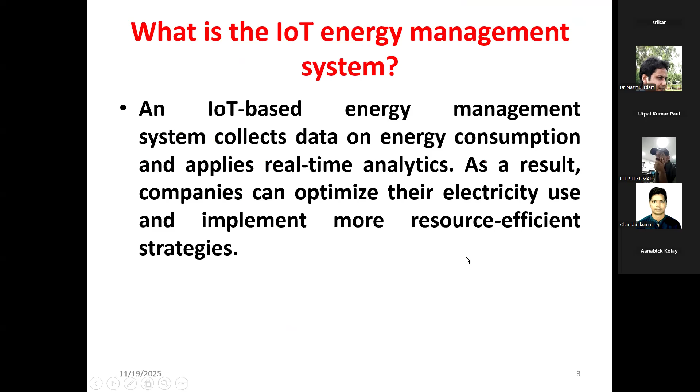How does this fetching and other things happen? Here we are using wireless communication protocols, such as Zigbee or LoRaWAN. These are the different facilities which we are trying to use in the system such that I am able to communicate from the device onto the system.

Nowadays we are using Wi-Fi very much for data transmission and other purposes, because earlier we had only wired connections, which were for a limited purpose. But because of Wi-Fi, I got larger bandwidth and I'm able to communicate with any system anywhere. That's how 5G and 6G are used nowadays. Most people are now using fifth generation wireless communication, through which we are able to make the data flow in a comfortable, quick and faster manner.

And then we have edge computing. When I'm talking about edge computing, it talks about the response time. Response time means whenever something goes wrong, how much time is required for me to respond to that particular issue. As I told earlier, whenever some electrical equipment is in use but I'm not using it properly, I have to get some intimation. That intimation is called the response time, or we'll call it latency.

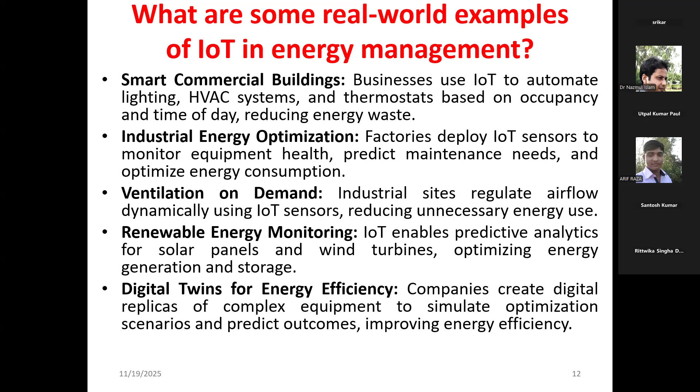What does IoT system management really look for? It looks for crucial and efficient handling of numerous connected devices, which must work in smooth operation, be secured, and function without being affected. Some devices require more current, some require less, and accordingly the system has to provide that - that is called the management.

The second part is remote configuration, which makes the system more secure and reliable. You configure the system for when it has to be on or off, managing things through the software.

When going for an IoT energy management system, I'm looking for real-time energy monitoring. At present, the IoT senses the data and tells what exactly is happening with the devices in real time. Based on that, AI-driven predictive analytics tells whether demand is more or less at a particular point of time, and how to optimize things and reduce inefficiencies. Smart grid integration balances supply between high-demand and low-demand areas, as I mentioned with respect to industry and home applications.

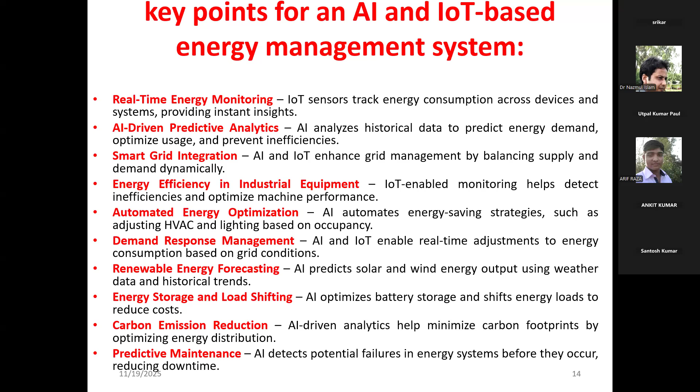Whenever you are using the system, you need to predict, and accordingly work with the system. So this is one simple schematic of the IoT for different applications, how you can make use of the IoT system.

Now look at what IoT has got, and what are the different functions it has to do. Then what is system management? System management refers to the process of managing the entire life cycle of Internet of Things devices and sensors, from planning and onboarding to monitoring and maintenance through retirement. That means the management is from input to output. The entire process has to be controlled, and it has to work according to the requirement and according to the process. Then only we are able to do the things.

So somebody has to do that management. So IoT will take care of that management.

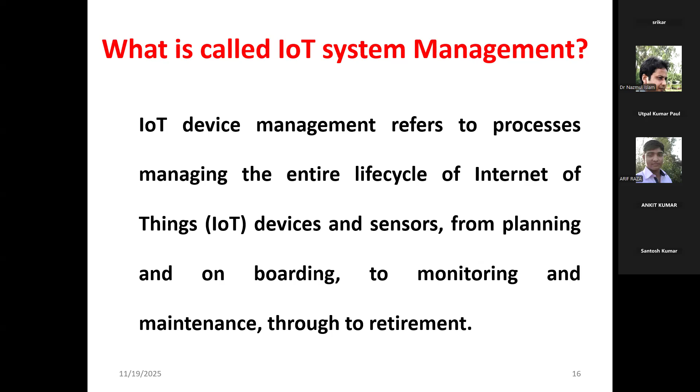So here, whenever the system wants to be better, we need to have smart sensors and data collection. Smart sensors get the desired data. If unwanted data exists, you try to discard that. Collect the data.

And this data has to be stored. Move it to some memory location - that is, connected devices and automation. Then the data has to be stored in the cloud.

And you have edge processing - already we have discussed that. Whenever you want to make a decision based upon edge processing, you have to make the decision and try to develop some algorithms. Through the algorithms, improve the efficiency of the system by detecting the inefficiency and faulty processes in the system, such that we are able to improve the sustainability of the system.

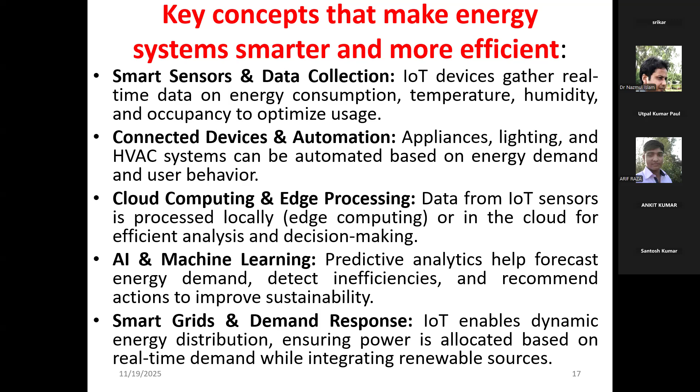And based upon the demand, the smart grid has to work, whether to allow or not allow in any given real time. What are the different renewable energies there, how are we able to use them and interconnect them. Then what are the trends of this renewable energy?

So why do we have to use these IoTs? First one is lower carbon footprints - that means try to minimize the wastage of power. Optimize the system, and it improves the efficiency of the system, reducing the emission. So when you are not using them, it causes the emission of carbon. So you try to avoid that by switching it off. So you are able to reduce the carbon footprints.

Second one is enhanced renewable energy integration. Try to use solar, wind, or whatever other fossil fuel alternatives are there. You are trying to make use of them.

And reduced energy waste - automated demand response and predictive analytics prevent overproduction and unnecessary consumption. So energy management clearly addresses unnecessary consumption. If it is not required, switch it off automatically. If it is required, you use it.

Decentralized energy systems - where the IoT will take care of peer-to-peer energy trading and try to provide decentralization. That means if in a colony there are 100 houses, all 100 houses are going to be seen in a different manner. So that is called decentralization.

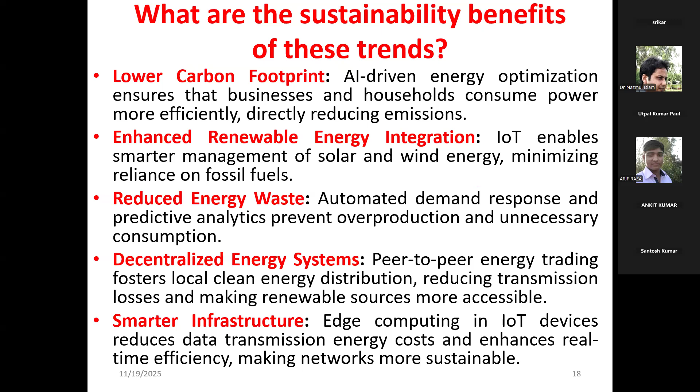And smarter infrastructure - so it makes a cutthroat decision to say use or not use any system.

So in smart grid management, we have three things. One is real-time monitoring - at present, what is the use? Really, does he need that amount of energy or not. By means of sensors, you read it. By means of algorithm, you analyze it. And then you allow that power to be used or not allow the power to be used.

And load forecasting is - so you make a decision that now, for example, in the morning, we are using the water heaters.

So it has to predict between 8 to 9, the water heaters are going to be on, so more power is required for this particular house, so you try to provide more power. After that, we are not using it, so we all are going to office, nobody is there at home, so zero power is required. Then you turn off everything such that that power can be used somewhere else.

So this decision has to be made based upon the previous or historical data and other parameters we are trying to work with. The third one is optimized: you try to use only the specified and optimized load, and you can reduce the waste in the system.

And why is this renewable energy required in the system? That is for predictive maintenance. This explains how artificial intelligence can analyze the data from a renewable energy system, predict the failures, and improve the maintenance.

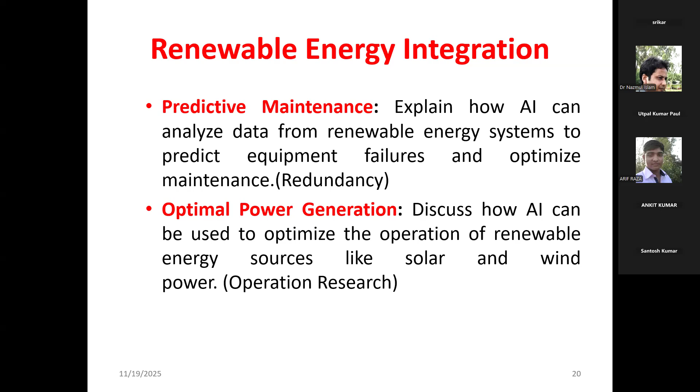Then optimal power generation. So whenever you have other alternatives, you try to produce the optimal power and try to use these systems.

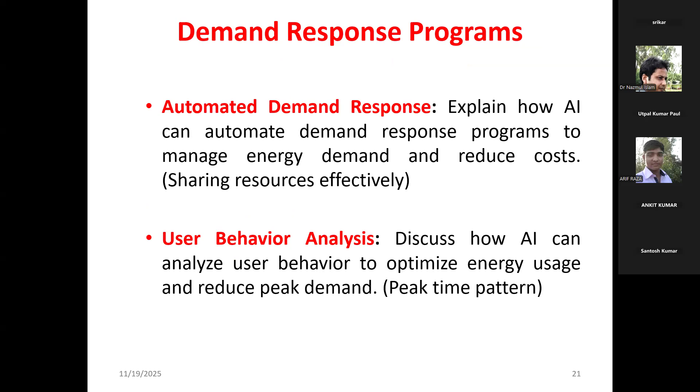And what are the programs? Demand response programs, so automated - you make the whole system automated. And behavior analysis: when is the power required more and when is it required less, when is the peak time and when is there no peak time in the system - that decision has to be made. And whenever I'm talking about management, that is process management.

So data collection and transmission - how you are getting the data and how you are transmitting it. Integration with AI - whatever power data you are taking, integrate it with the algorithm. The algorithm will make the prediction and maintenance is going to be done.

And then finally, you have the case studies. A few case studies of the grids, renewable energy, and energy efficiency can be discussed, and we can work on these things, and we can apply artificial intelligence and other cases onto this.

The challenges are data privacy and security. Whatever data is there, it should not be given to somebody, so the security has to be proper - my data should not be theft by other people.

Scalability and complexity - scalable means knowing what energy is required, so that I have to tell. And ethical considerations - ethical consideration is that the theft of energy should not happen, so the algorithm has to take care that ethically it is right, that it is doing ethical jobs. Only then can you make use of it; otherwise, it should not be supported.

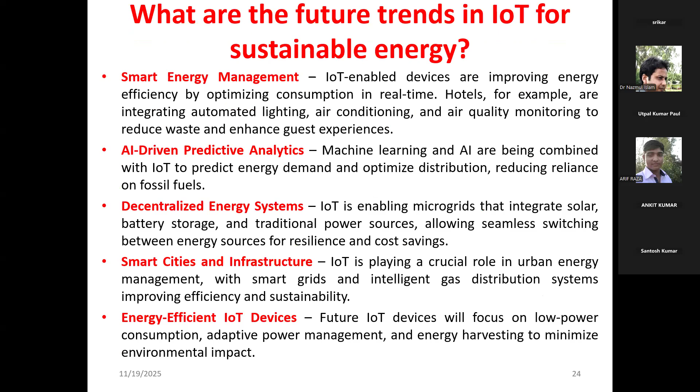And sustainable energy - we have already seen this. To conclude, IoT-enabled energy management is revolutionizing how societies pursue sustainability, improve operational efficiency, and reduce cost through real-time data and predictive analytics. The continuous advances in connectivity, AI, edge, and cloud computing are accelerating IoT's transformative impact on energy systems globally, and it is able to facilitate energy devices and grids for sustainable development while addressing challenges related to data privacy and crucial applications.

And as we continue the ongoing digital transformation in the energy sector, as I told you, the cables are being replaced with Wi-Fi. So again, IoT will have importance, and collaboration with other technologies will make IoT-based sustainable energy management more effective in practice. So that's what I want to tell and discuss with you people.

I hope if any questions are there, I am ready to take them. Thank you.

Thank you so much, sir. Anyone have any question regarding this from participants? Anyone have any questions? You can ask. Anyone have any questions? It's okay, thank you then.

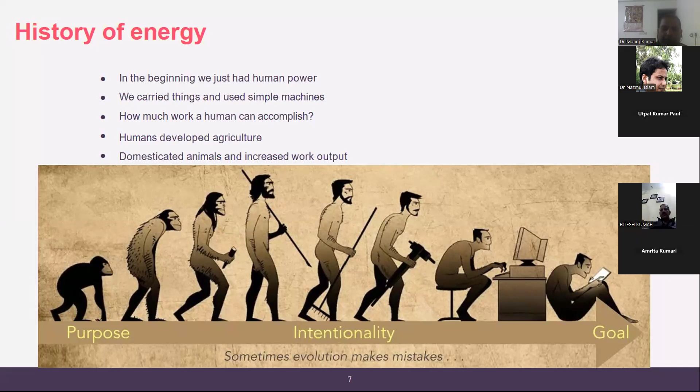This is the evolution of human beings. From the starting to today's era, even working in 6G generation, we are moving from start to end, yet in the same position. In all aspects we are looking to get more improvement and efficiency. To do that we need technology, and that requires more energy. So finally, we have to optimize our energy resources.

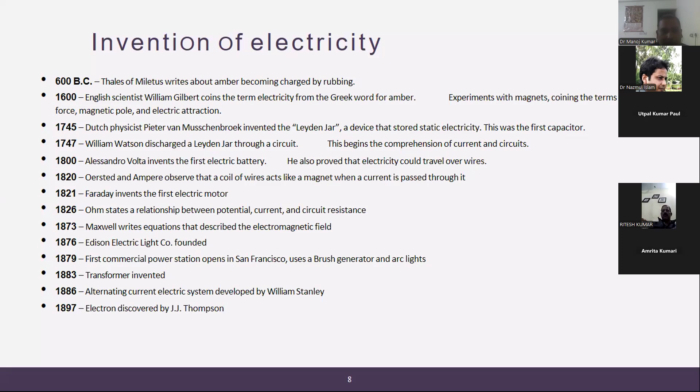This is the journey of invention of energy. Finally, today we get energy by electricity. The significant inventions by scientists from 1745 to 1897 - you can see different scientists, William Watson, who discovered comprehension of current and circuit. Then Faraday invented electric motors, then Ohm, then Maxwell, Edison - and the breakthrough was Edison founding electric light in 1876. This is the contribution of a number of scientists who worked out different options in electricity.

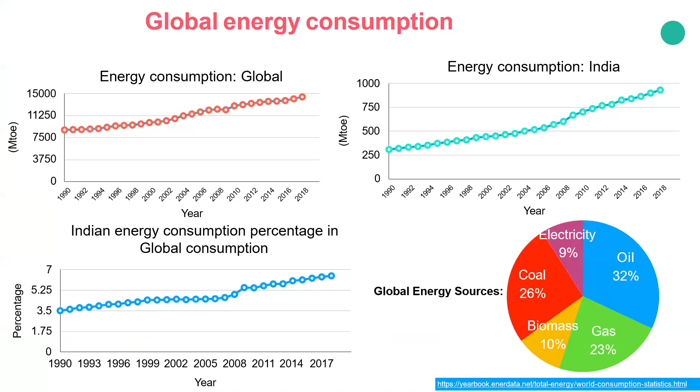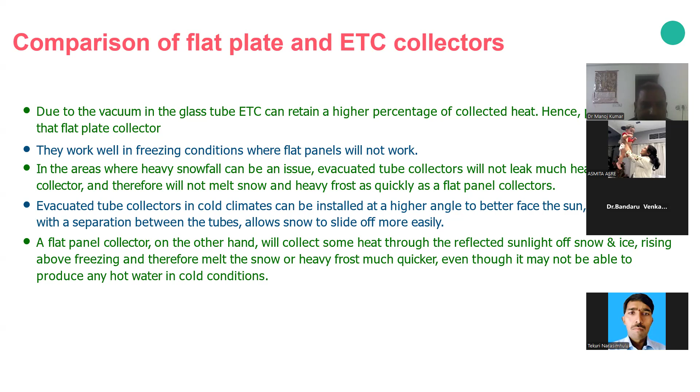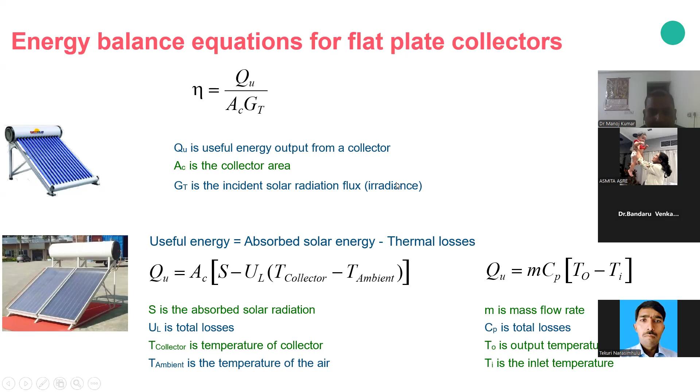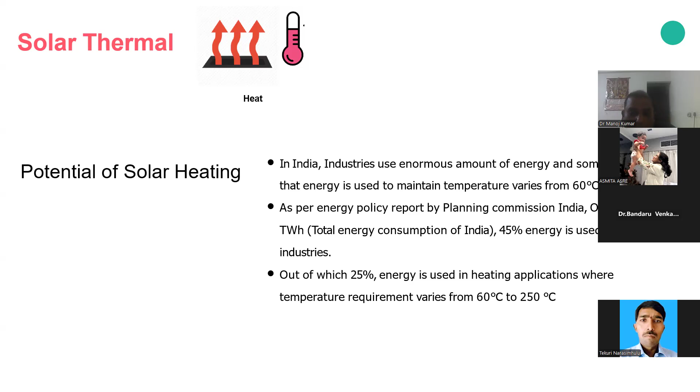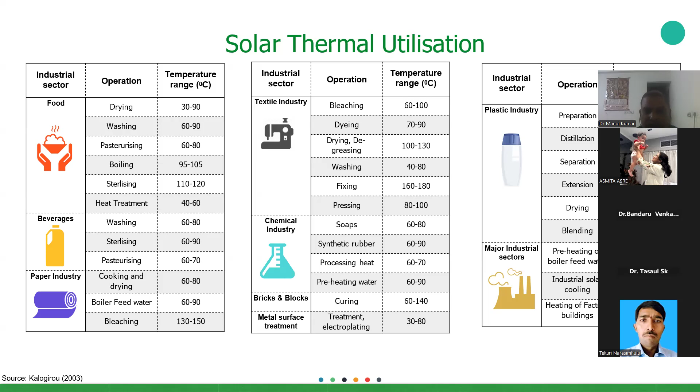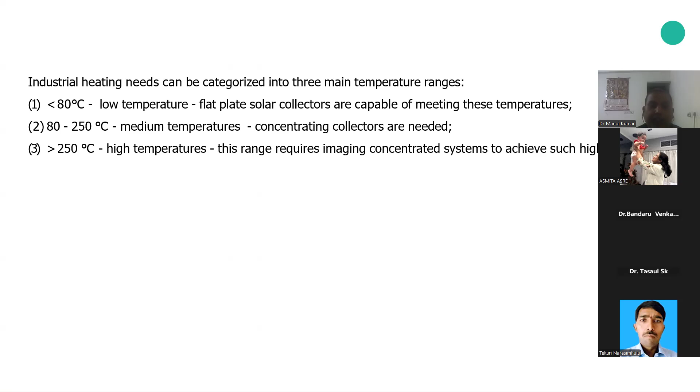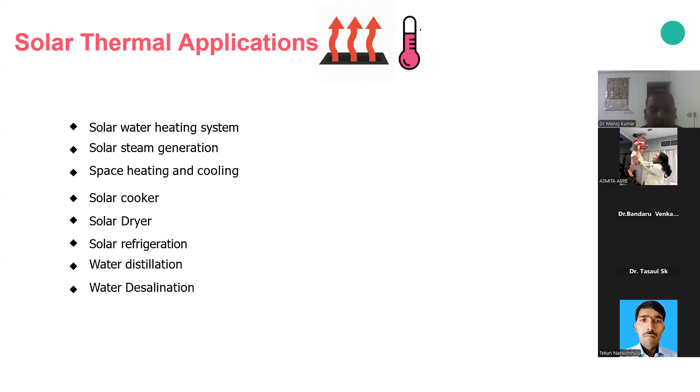Even we are working on solar refrigerators also, so we will not use electricity from power plants to operate our refrigerator. Then especially for water distillation, especially in Saudi Arabia where there is a lack of water. So distillation is a very important issue. Even in India, a lot of people face so much pollution in water, we need distillation. We cannot go for all aspects using electrical energy to purify things. So we have an aspect of solar thermal application also.

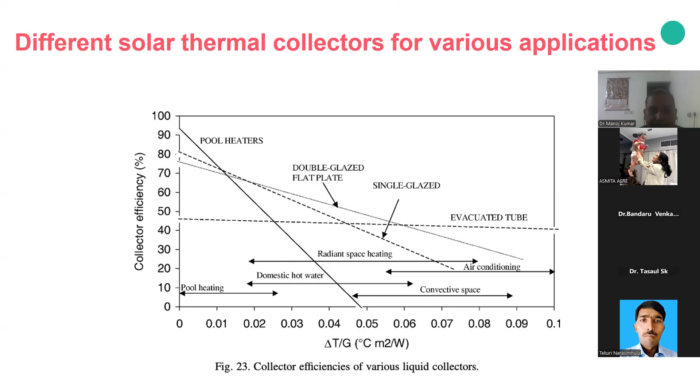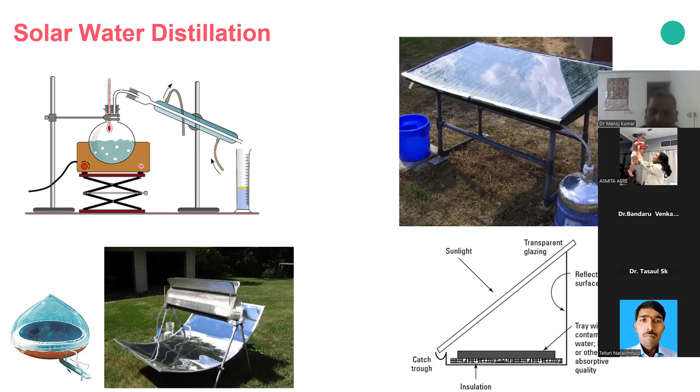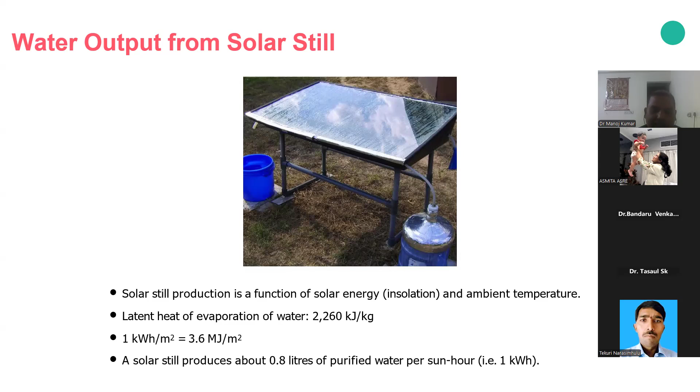Now we have discussed a lot of applications in different industries for different processes, even at different operating temperatures and aspects. We can conclude that by the use of solar thermal energy, we can replace coal and other petroleum products for our applications. So the one solution we got is solar thermal energy for all aspects in industry.

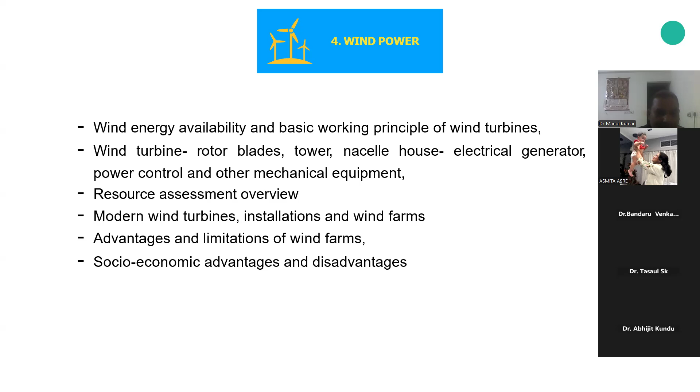So what is wind? Wind is air in motion, traveling between areas of different pressure, or due to pressure difference. According to Pascal's law, or Bernoulli's principle, total energy conserves as P plus delta P plus rho gz plus half rho V squared equal to constant. So total energy is constant.

There is movement of air, wind, due to temperature difference. Even uneven heating causes pressure difference in the environment or atmosphere due to uneven heating of Earth's surface. So warm and light air rises because it becomes lighter, and due to density difference it moves in the vertical direction, and due to the natural convection process, heat transfer takes place, carrying enthalpy as well.

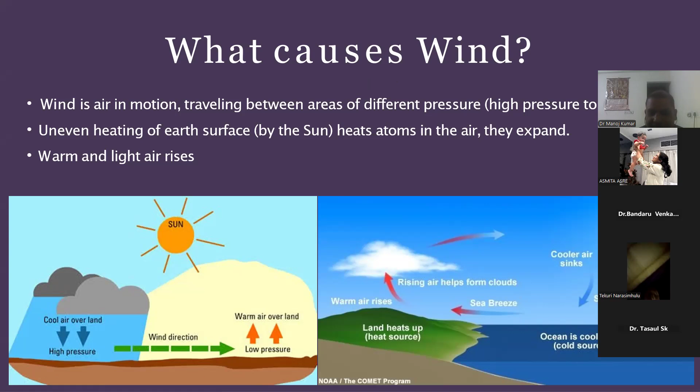Now again we are going for mathematical analysis. We are dealing with technology, so we cannot just talk about qualitative analysis of any technology being beneficial without a mathematical model. Why is it important? When we design any wind system or solar system, we should know the mathematical parameters like design parameters, thermal parameters, and for material selection, we should know the material properties of the system.

For wind power, it's very simple: kinetic energy equals half mV squared. Finally it's converted in terms of density and wind speed, that is half rho A V cubed, where rho is the density of air, A is the swept area of the wind blade of the turbine, and V is the velocity.

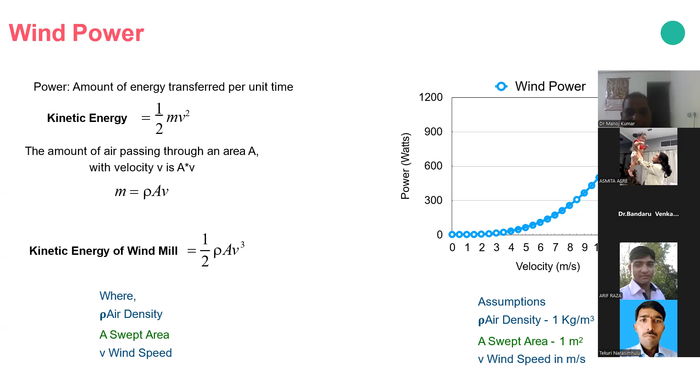Again, it is explained in terms of the design parameter of the blade of the turbine: half rho pi D squared by 4 into V cubed. Why are we looking at this? Because we have another choice, we can increase or optimize the kinetic energy by changing the diameter also. So design parameter is one thing, and material selection is the second important thing.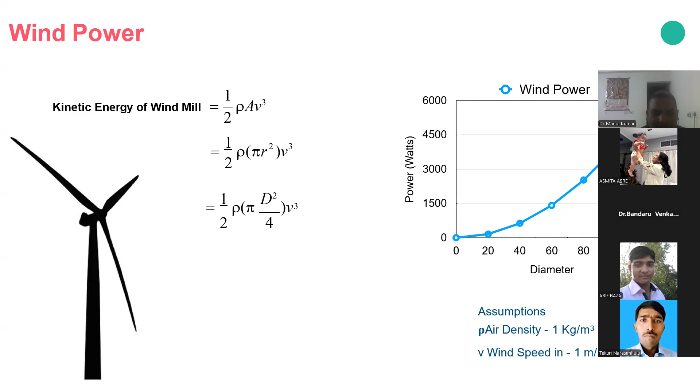So there are some important features we should know for the selection criteria for windmill installation. The first is wind resources, then environmental impact. The most important thing is minimum risk of agro-forestry operations. It should be close to a suitable electric grid, so that whatever energy is generated can be transferred to the electric grid for further use.

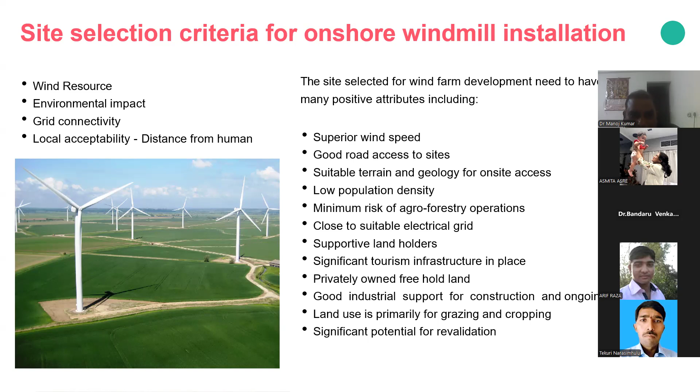That I already explained in the first slide. So whatever development we are going for, it should be user friendly and environmental friendly. That will help for further development.

So we have studied about mathematical modeling of wind turbine. What are the ways to improve wind turbine output? The first is, in the mathematical equations I explained, faster wind speed, and we go for the blade, with different parameters like the angle of blade and the thickness of blade.

It is similar to the turbine in hydro power. So a larger generator is also required, just to convert this wind energy into electrical energy, and finally that will generate electricity. So these four are the important parameters.

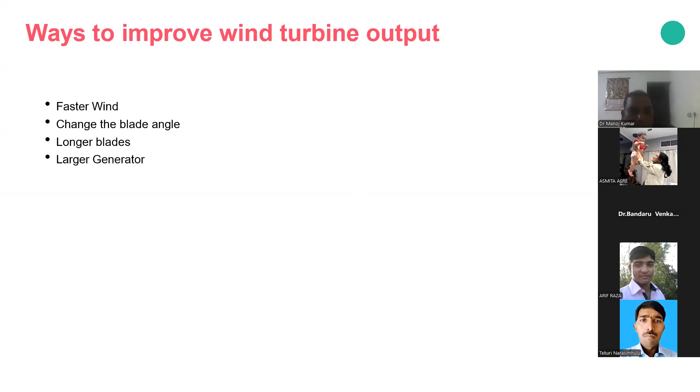So if you are going to do a study for anything important, the first important thing is: what are the advantages? Why should we go for that? Without this objective, nobody can go for any technology. So the first thing is renewable and sustainable source. It is renewable, no gas emission, no cause of global warming, and no impact on society, surroundings, or the environment.

Second is reduction of fossil fuel consumption, meaning we are exploring alternatives, so we will not depend much more on fossil fuels when we have alternatives. Then, free resource: wind is free, there is nothing to pay as tax for using the wind.

Second is small carbon footprint, then better land utilization. All this wind power installation takes place on the coastal area where we don't have any industry, or especially for the agriculture sector that we have to pay cost for.

Next, both industrial and domestic turbines exist in a range of sizes, depending on our wind velocity and our requirement. Especially in that case, we are also looking for a large generator to convert wind energy into electrical energy. Then, it can provide power in remote locations.

In some areas of India, especially remote parts of western Gujarat or Maharashtra, it is very difficult to supply energy from the main grid that is based on fossil fuels. So we have an alternative to provide energy to people in remote areas through the use of wind power.

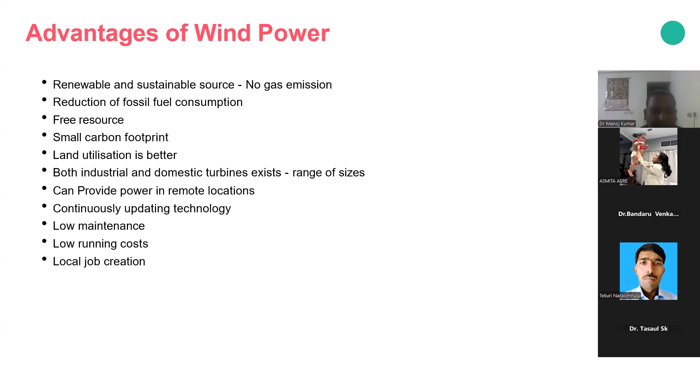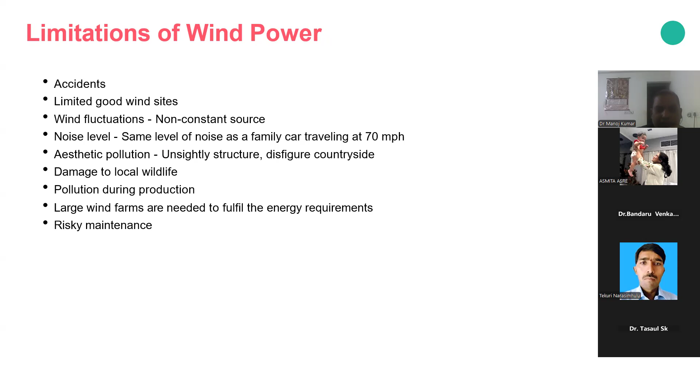But the physics behind that involves drag force and lift force. I'm already teaching courses in NIMS University where we talk about drag coefficient and lift coefficient. When air flows over the surface, it creates drag and lift, causing rotation, and due to rotation, it has energy. There are optimized angles between the blades that increase the final output power, so it is very difficult to design a blade.

From the naked eye, it seems very simple for it to rotate, but when designing these blades, you have to check stability for mechanical strength as well as aerodynamic strength, since we are dealing with blades. All these parameters make the design more technical.

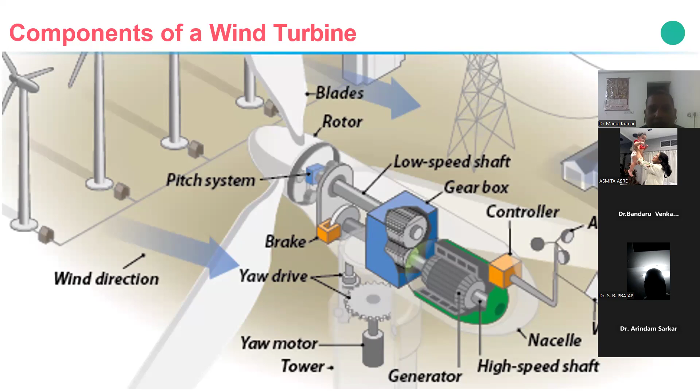So we can go for commercialization even in remote areas for the development of our country, and it is replacing fossil fuels very quickly. That is really an interesting topic for our future study.

From the previous study, I explained why we are looking for renewable energy. First, we explained that due to the use of fossil fuels and petroleum products, oxidation of these products emits CO2, CO, NOx, and other pollutants that indirectly increase surrounding temperature and may cause global warming. So just to remove these problems, we shifted to renewable energy.

First we discussed solar energy, which is extremely versatile and user friendly, covering its advantages, disadvantages, and different types of collectors. Then we moved to wind energy, where the problem is we cannot use it in some areas, especially UP, Bihar, and Himachal Pradesh, where we don't have sufficient wind velocity. That is a restriction for wind energy, but not for solar thermal energy, which is versatile, and in 80 to 90% of areas people are generally using solar collectors for energy generation.

Now exploring options beyond fossil fuels, we look at ocean energy, also called ocean thermal energy, which we'll discuss in detail in the next slides, including its availability in the Indian context, conversion processes, and technical aspects. Second and third, we'll cover tidal power's basic conversion principles and challenges, then primary energy supply, and finally assess whether the system is sustainable or not.

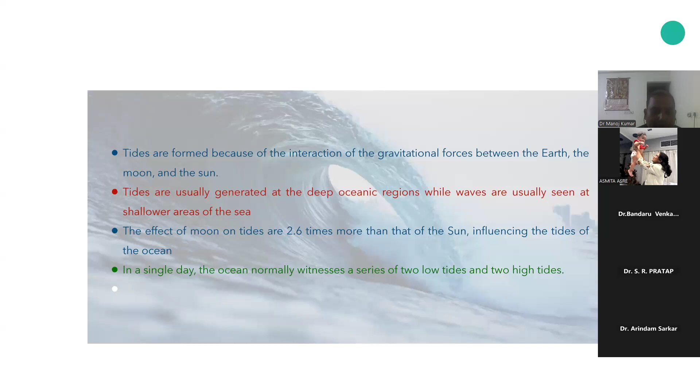As I explained earlier, there are 2 types of tides. One is high spring tides, which occur when the sun and moon line up with the earth - this occurs whether they are on the same or opposite sides, meaning the angle between these three will be either 0 degrees or 180 degrees, giving us a high tide region. The second is low tide region, which occurs when the sun and moon line up at 90 degrees to each other, giving us a low tide region.

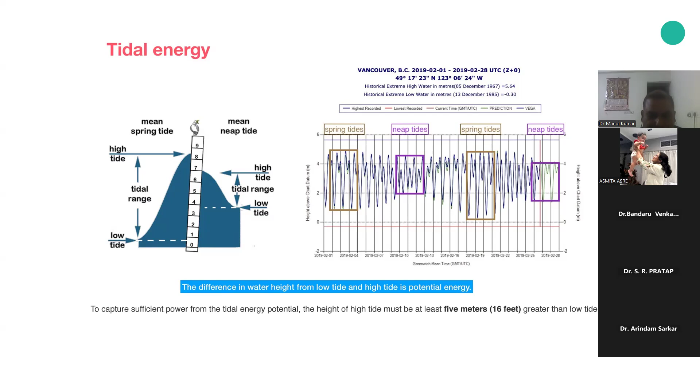A total of 12,455 megawatts of tidal energy is generated, especially in Kutch and Khambhat. These are the two important locations in India with maximum tidal energy extracted from the ocean. Apart from that, in Andhra, Tamil Nadu and other regions, there is a moderate value of tidal energy, comparable but not zero, though the maximum points are only at Kutch or Khambhat.

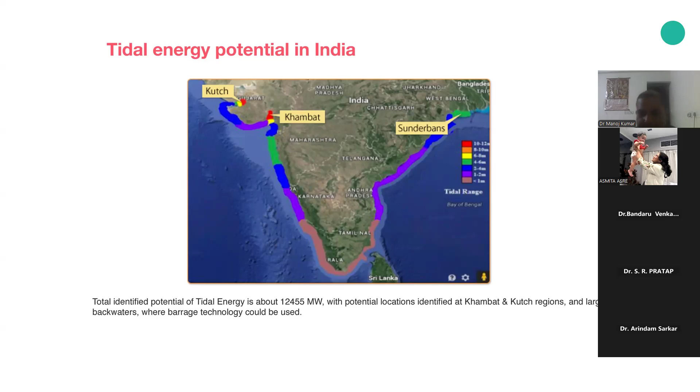So what are the mechanisms that generate tidal energy? This is the technical aspect, called a tidal generator. One type of tidal generator system uses a structure similar to a dam, as we have seen in hydropower plants. The barrage is installed across the inlet of an ocean or lagoon, forming tidal basins.

It works like a water reservoir storing energy from low tides and high tides. Sluice gates on the barrage control water level and flow rates, allowing the tidal basin to fill on incoming tides and empty through an electricity turbine system on the outgoing tide. Since we don't have high tide and low tide all the time, we use a generator to maintain continuous energy, with flow controlled by the sluice gate.

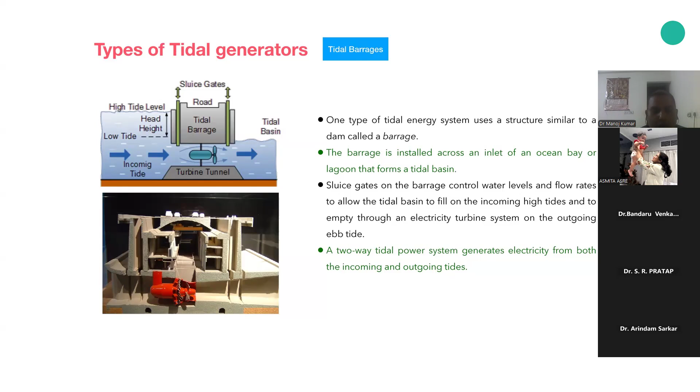This process is similar to a hydroelectric power plant: in winter or rainy season we store water, control the flow rate, and get hydroelectric energy throughout the year. Similarly, in the middle of the sea, tidal generators are installed, working with different types of high tide and low tide. In the corner of the slide, I have shown the actual tidal generator installed at the mid of the sea.

In 1961 and 1967, the Rance Tidal Power Station was installed in France, making France the first country to work on tidal energy, about 65 years back. The power plant, built by Electricite de France, uses tides from the Gulf of Saint-Malo on the Atlantic Ocean to turn its 24 turbines, which they used for commercializing the energy system.

Can you guess how much energy is generated? It generated 240 megawatts, averaging 57 megawatts, giving a capacity factor of 24%, which is very significant. This study explains that we can pursue tidal energy generation where oceans are near the country. Our country is surrounded by oceans on three sides, so we have a lot of opportunity for tidal energy generation, as I have already shown on the map of our country.

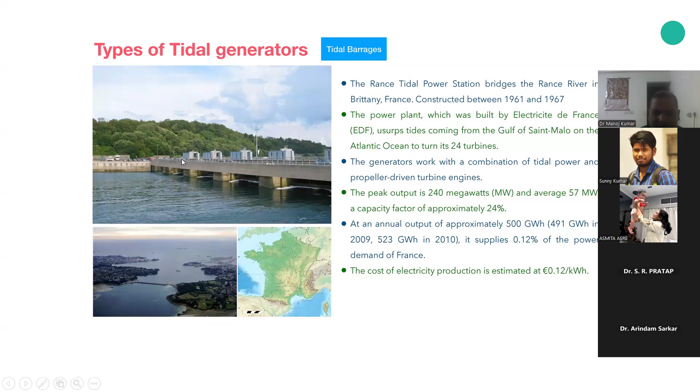That is types of tidal generators. Since 3-4 slides I am discussing about the different types of tidal generators, their components and how it's working. So from these slides we have concluded that...

France is the first country who mostly focused on tidal energy generation sector, and that output was significant. This study also explains that we can go for that because on three sides of our country we are surrounded by oceans. All favorable conditions are there. I have shown the color contour for our country where we can invest our money in the tidal generation energy sector. That will also help our alternatives for fossil fuels, with generating capacity of 20 megawatt and a net output of 30 gigawatt. These numbers motivated us to go for this study and go for this system.

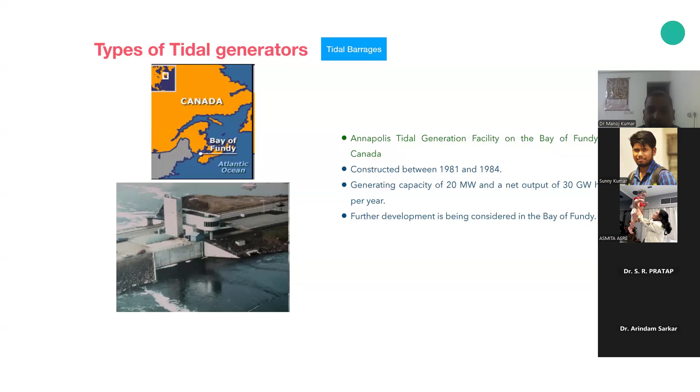Next. So again, we are talking about tidal turbines, which look similar to wind turbines. I already explained that it is similar to the wind turbines. There only we are using air, and here we are using water. They can be placed on the sea floor where there is strong tidal flow, because the water is about 800 times denser than air. So this is the technical aspect where we can go for optimization or maximization of tidal energy compared with the wind turbine.

So even it is not so easy. Turbine blades are more expensive. Tidal turbines are more expensive to build than wind turbines, but they capture more energy. What is the reason? The reason is the velocity of water, if it is not significant, the density is high. So due to density, it has more impact on the blades, which may cause bending. So from the design consideration, we should go for a very different, practical approach to understand and explain the safety parameters. That's why designing of tidal turbine blades is more expensive.

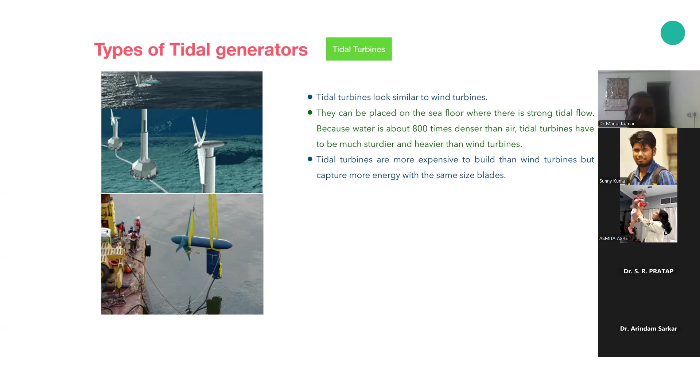So again, similarly for the third one, every system has advantages and disadvantages. Advantages are very simple: clean and compact, continuous, predictable, life of the plant. There is no pollution at all. But the disadvantage is high construction cost, because we are going to implant the system at the center of the ocean. So that is very challenging. Second thing is it may increase turbidity, the amount of matter suspended in the water. The third one is the impact of electromagnetic emissions on marine life.

And finally, lack of research. We don't have sufficient literature survey on this topic or in this study, so we can extend the study for exploration of research for the next generation very frequently. It requires a lot of effort to study in this area, especially in tidal energy. Even though it is effective, it requires more investment. That's why people are not going in this direction, especially in our country. Next slide.

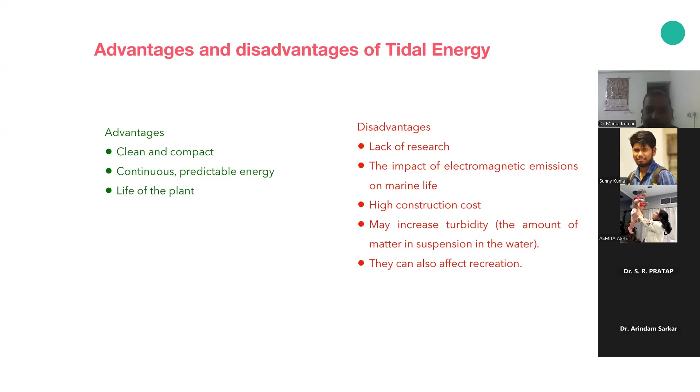So site selection is very important. The very basic feasibility study is that we should have historic data on tides and tidal currents, acquisition of data system, and typical weather conditions. Then mathematical modeling is very important. I am mentioning this thing again and again: when you are going to design new things, you should have some mathematical data. Again, foundation investigation, detailed analysis of various modes of operation, then detailed design, tender preparation and tendering - that is the economic point of view. So these important parameters are very important when we are going to explore tidal power systems in our country.

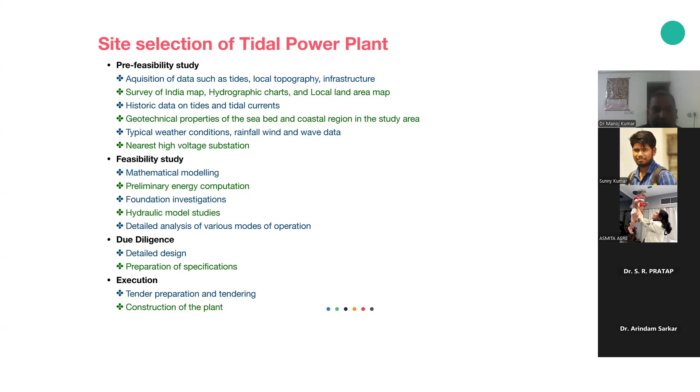So coming to the last option, we have more options. In our slides we started from solar thermal, then moved to wind energy, then gone for tidal energy, then we are going to biomass. In all cases we have some limitations, especially in tidal energy, where we have a lot of investment, and it's very technically challenging to install equipment at the center of oceans. For wind energy, we have a limitation to the area - we cannot go to the upper Himalaya region, like UP Bihar region or Northeast region, as we have shown already. So the third and last one is biomass. All renewable energy sources have some advantages and some disadvantages, so on the basis of application and availability, we have to explore and rule out which one is most suitable for our condition. Now we are looking for biomass.

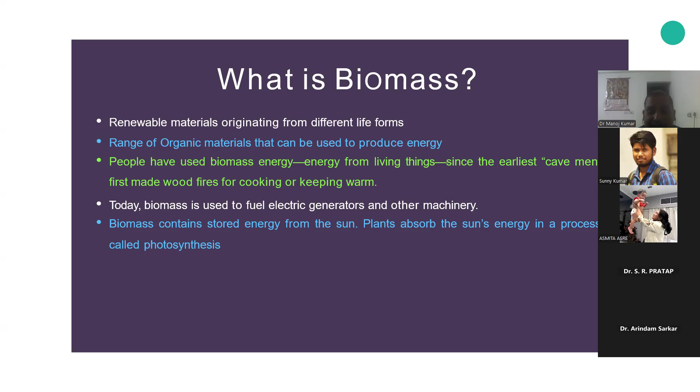Biomass is renewable material originating from different forms. People have used biomass energy from living things since the earliest times, first made wood fire for cooking, and even in villages or in the country, we used to cook in earlier times using cow dung. So that is biomass, and each and everyone is easily aware of those things. Biomass is used to fuel electric generators and other machineries. Biomass contains stored energy from the sun - plants absorb sun energy in a process called photosynthesis. So this is the technical aspect. Photosynthesis is the main reason responsible for biomass energy. Next slide.

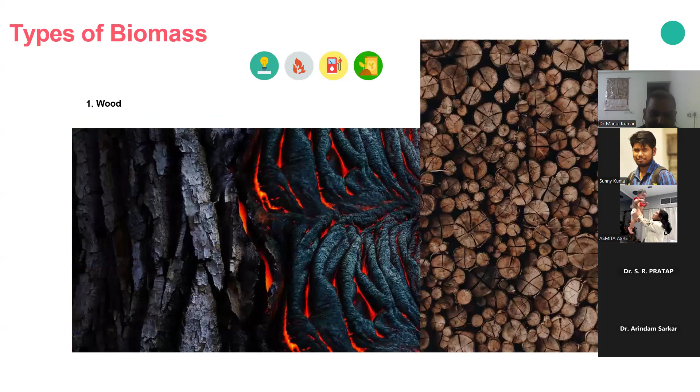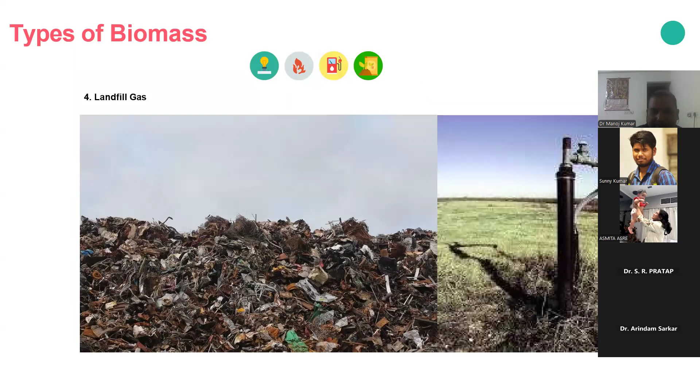Okay, so alcohol, you can see that. Yes, you can see the components of biomass raw material - sugar, starch, and cellulose - that is converted into bioethanol. And in these days, we are working mainly on 2 or 3 technologies.

I belong to a mechanical background. I have done PhD in thermal management system of microelectronic cooling. So there, like especially today when we are talking about technology for IC engines, we are looking for either EVs, electric vehicles, or we are going for bioethanols, or we are going for hydrogens. So it is one of the cleanest fuels and cheaper fuels that is used for our technology.

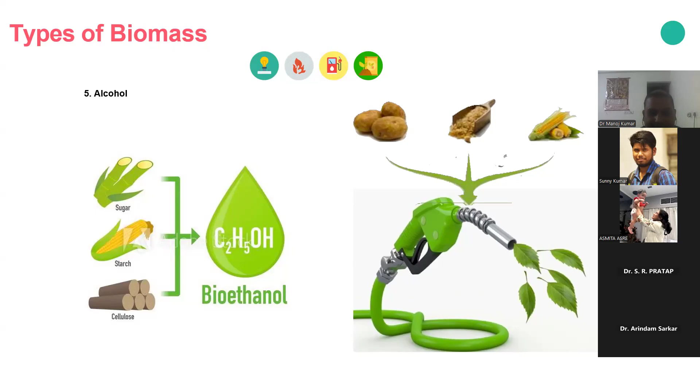So what is the utilization of biomass? That is combustion, anaerobic digestion, fermentation, and mechanical processing. By anaerobic digestion process, you will get biogas. By fermentation, you will get bioethanol, and by mechanical process, you will get oil. And all these three - biogas, bioethanol, and oil - are used for vehicle movement. So we are replacing fossil fuels, especially petrol and diesel, by use of biomass, biogas, bioethanols, and oil. That is very, very significant.

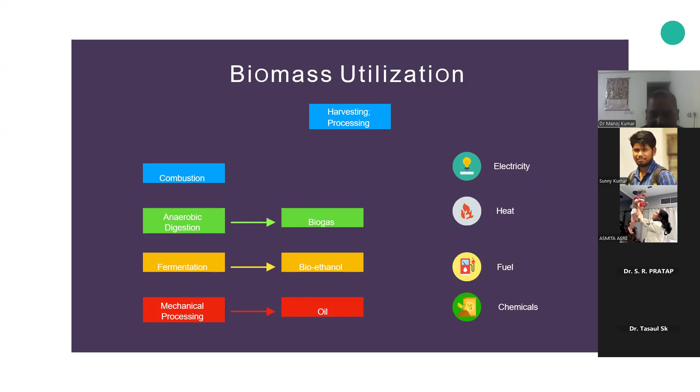So what is the process? We already studied that it is good for us. So how can we do that? That is called biomass combustion, like fuel plus oxygen equals carbon dioxide plus water vapor plus heat. That is a very fundamental chemical equation in chemistry. So biomass fuels are primarily composed of carbon, hydrogen, and oxygen. Their main products from burning biomass are carbon dioxide and water. Requirements for combustion: fuel, air, and heat, so there are 2 types of combustion.

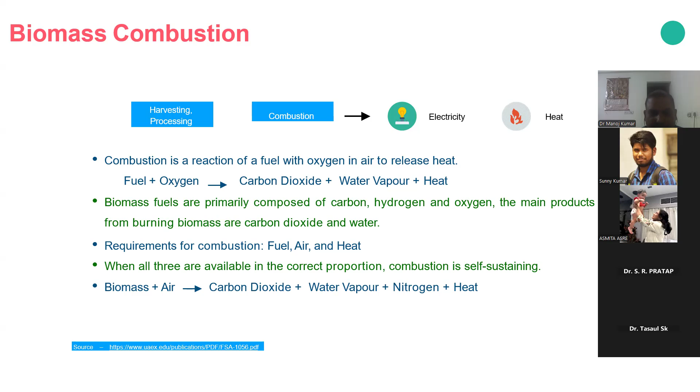The conclusion from the last 2 slides is that we clearly understood the alternative fuels, but what are the mechanisms, what is the technology from where we can extract energy. These are processes like pyrolysis and oxidation. These are the technologies where we can extract energy, but you should also understand the operating temperature. We can use the technology according to our requirement and conditions.

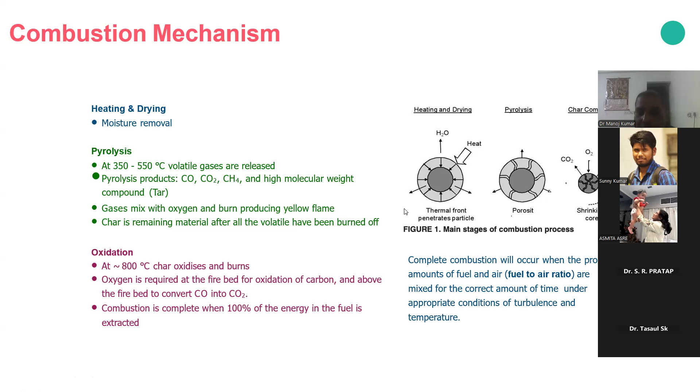So I have already explained the main stages of the combustion process, and you can see the chemical components, how they are connecting.

When dealing with this type of process, we should be aware of the calorific value for different types of fuels: solid fuels, gaseous fuels, and liquid fuels. The amount of heat produced by combustion depends on the type of fuel and combustion efficiency of the equipment used. We should be aware of this, otherwise we cannot calculate how much energy is being produced if we are predicting different models.

Or if we are exploring some different combination of components, we will not be able to understand mathematically or by numerical methods what will be the maximum amount of energy extracted by this process. So it's very important to know the calorific value of different types of fuels to predict the maximum energy output for any design or any predictive models.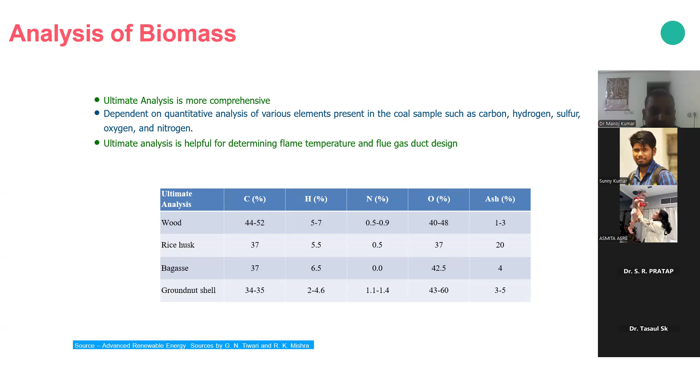So where will we do the experiment? This is in some cold places, especially Himachal and Uttarakhand, where you can see such systems where people burn coal and wood to get heat.

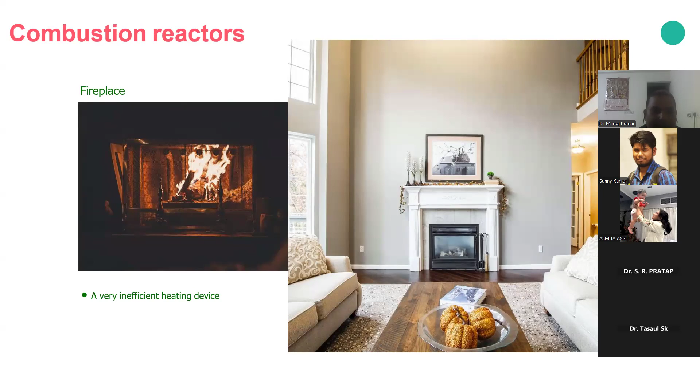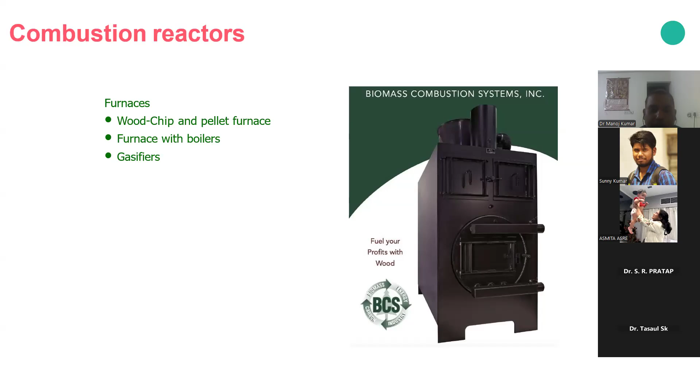In general, we can see it as a combustion reactor, and this is the actual combustion reactor where we are going to do experiments. The composition includes what is called a gasifier furnace and boilers, wood chip and pellet furnace. So where we are going to do the actual analysis, whatever we have explained as the 3 different types of analysis, we will do the same in this system. We will simply put the system in, and there are lots of procedures to follow for that.